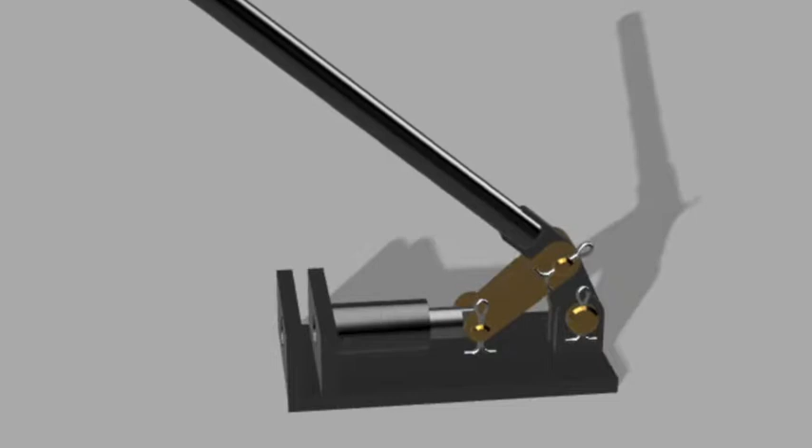Hi, in this series of video demonstrations we're going to be using Fusion 360 to create moving models of our mechanical design ideas. In video 7 we're going to be looking at how to create 3D components using the REVOLVE function. To help us demonstrate this, over the series we're going to be modeling this punch mechanism. To demonstrate the REVOLVE function we're going to be making the pins in this product.

Two ways we could create these pins. Firstly, we could just create a series of cylinders using the Extrude function which we've demonstrated earlier in the series. Then once we've created our cylinders, we can then add details like the chamfer and fillet onto the edges.

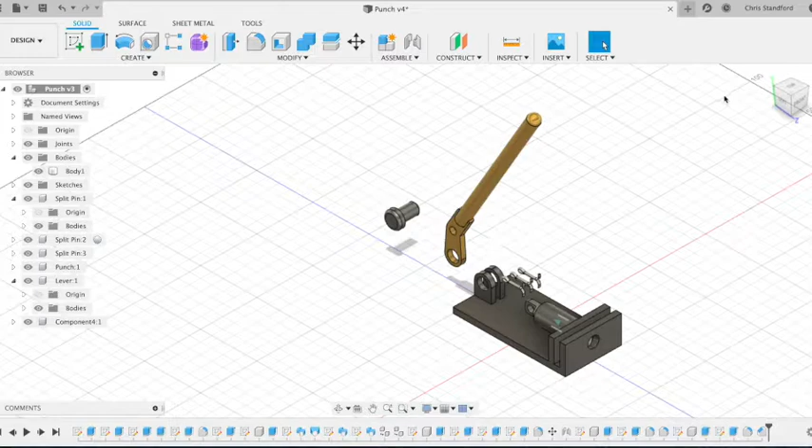Our pins need a hole for the split pin to go through, so we're going to start off a sketch on a perpendicular plane, and we're going to create a circle where our hole needs to go through. Our split pins are 2mm, so we're going to put a 2mm circle, and we need it to be 12mm from the shoulder of the pin.

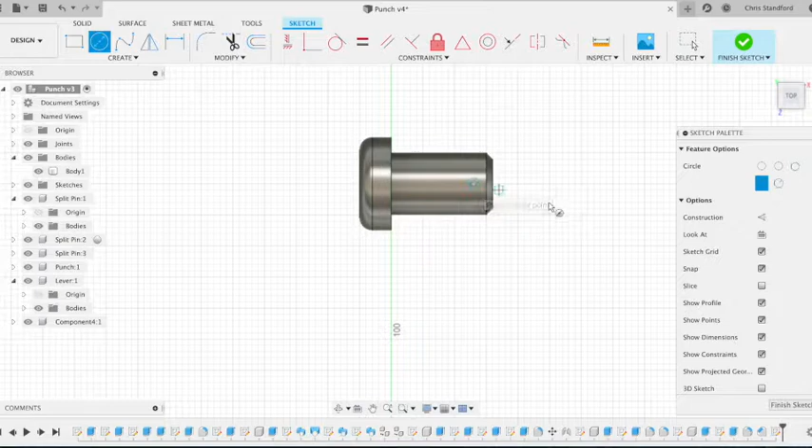And then we can extrude that circle up. As it extrudes through, it'll then turn to a cut operation, which is indicated by the red extrusion, and then we have our finished pin. We can then name the component and give it a suitable material.

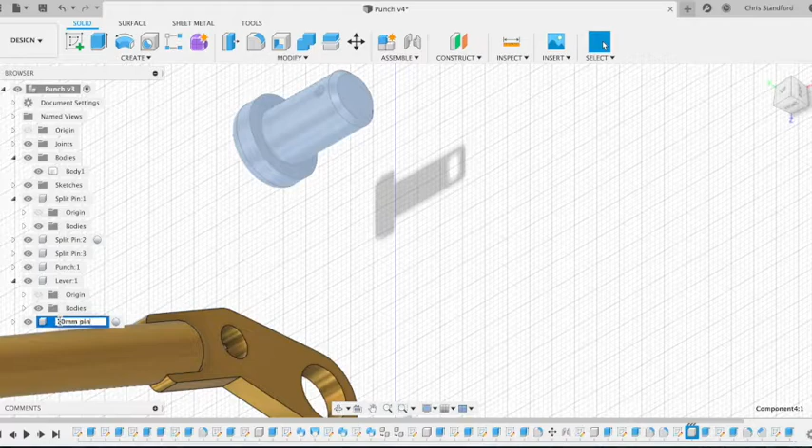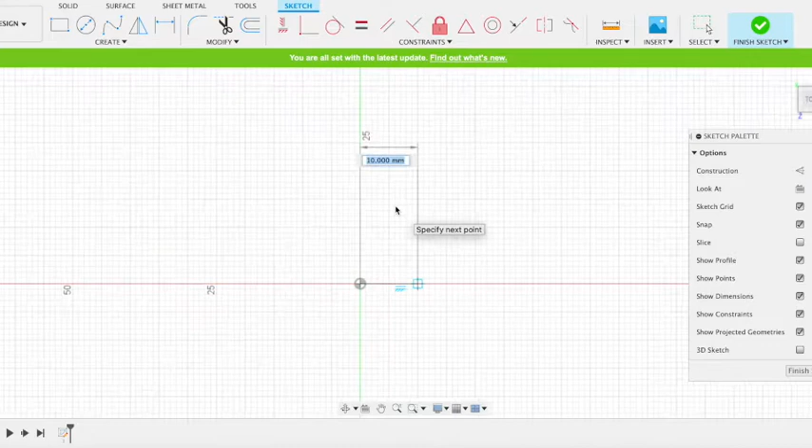A more direct way to create this pin would be using the REVOLVE function. So first we need to sketch the profile of the shape we're going to revolve. So we're going to imagine we're taking a section from the center of the pin to the outside. So using the line command we're going to draw our profile. We zoom in, we can see the smaller grid.

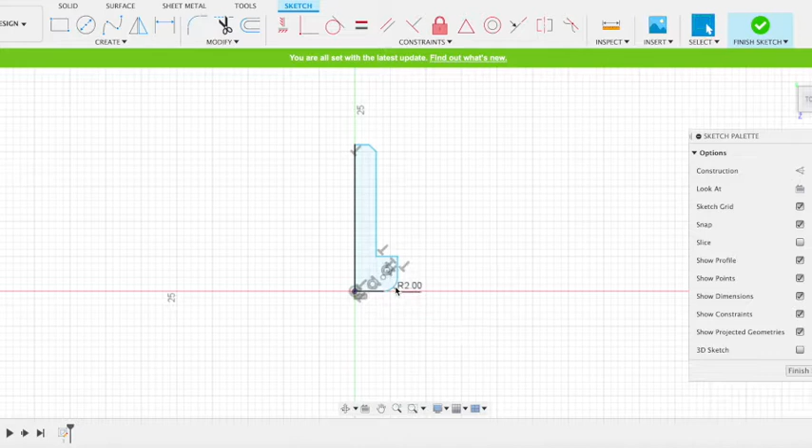Just rounding the corner off to get the correct profile shape. Then once we're happy with the profile shape, we can finish the sketch. We can then create our 3D form using the REVOLVE function. Highlight the axis you want it to revolve around, which is that one. Make sure we select new component, and we have our pin ready just to put that final hole through for the split pin.

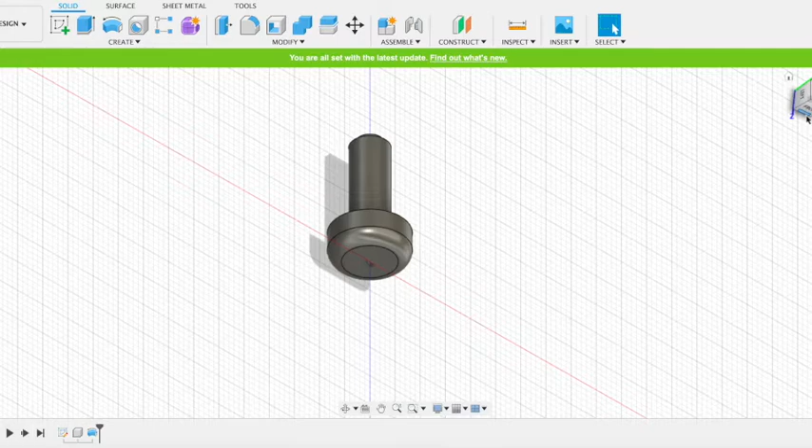We will put the 2mm hole in 12mm away from the shoulder in the same way as we did with the first pin, by extruding a cylinder through the end of the pin.

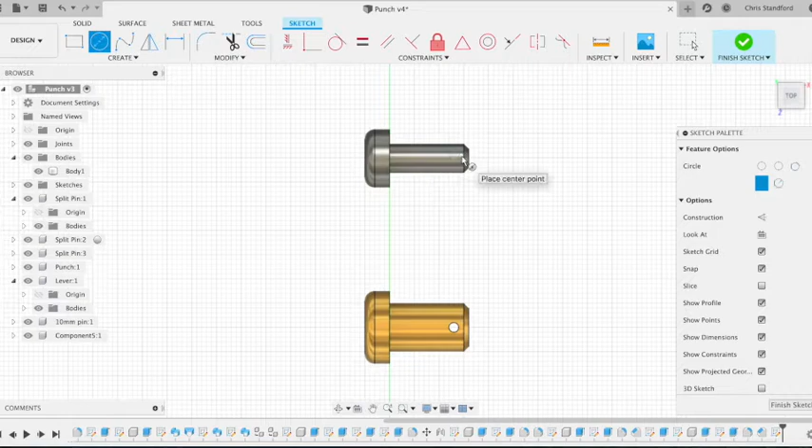The advantage of using the REVOLVE command to create the pin is obviously we only did the one sketch and revolved it all the way around, whereas when we extruded cylinders we had to extrude each cylinder separately, then put the chamfer, then round the edge off. So it is much more efficient to create it this way with less sketching and less editing to be done after. We're then left to rename the component, give it a material.

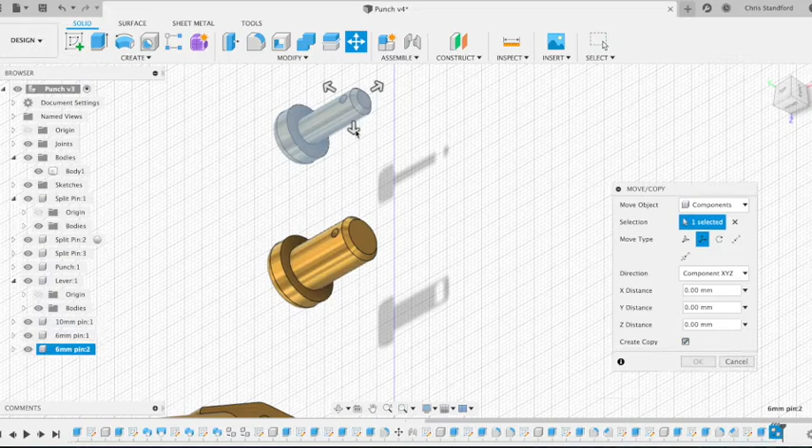Then finally for our model we want a second identical pin, so we're going to use the move command and create a copy of that component so we can use it in the final assembly of the model. And there we have our 3 pins, which we can create either through extruding cylinders or the REVOLVE command.